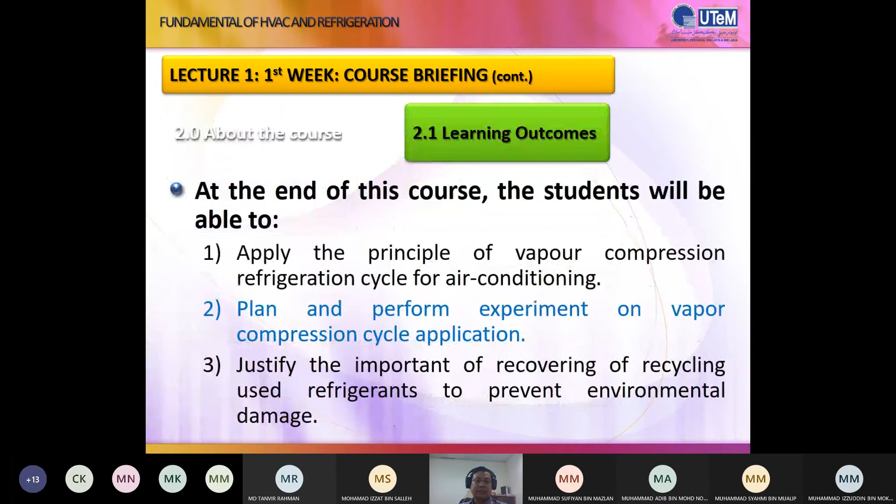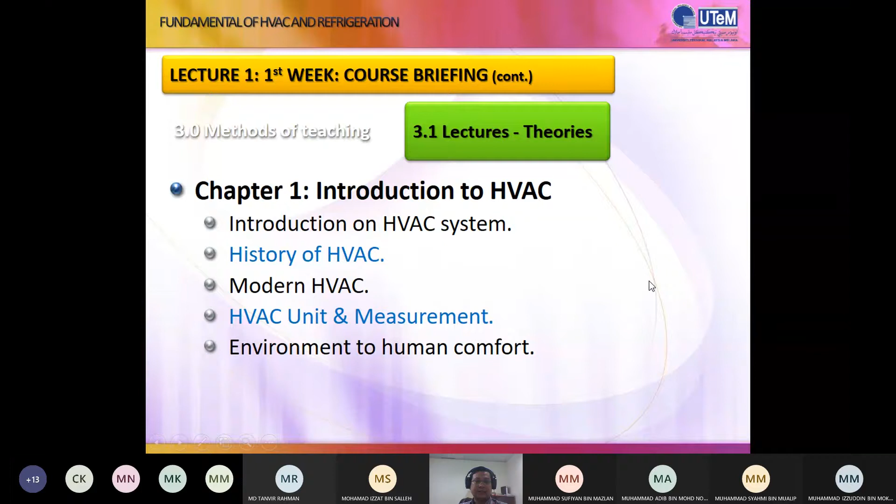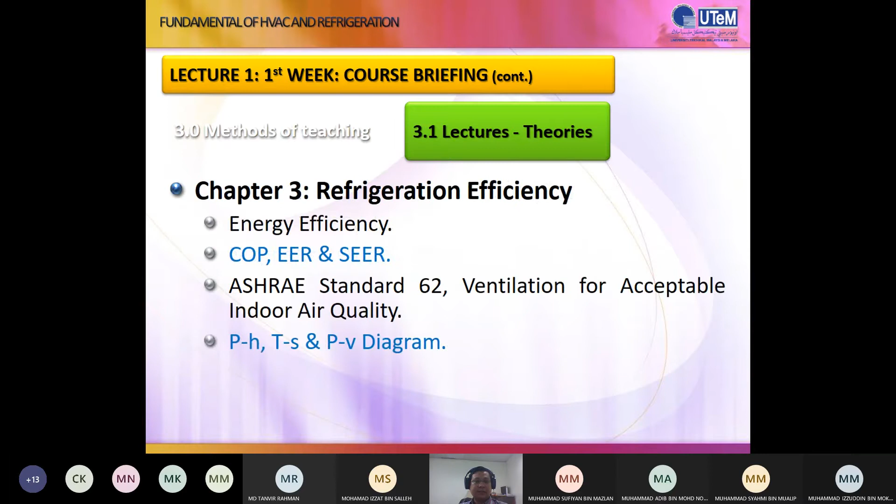So this is what we learned in chapter 1. Actually, you can refer to this in the teaching plan, chapter by chapter, and I will put this based on the week.

And then laboratory, based on this plan, maybe 7 labs, but I'm not sure what Encik Fairuz will plan for this semester, because we can only conduct online.

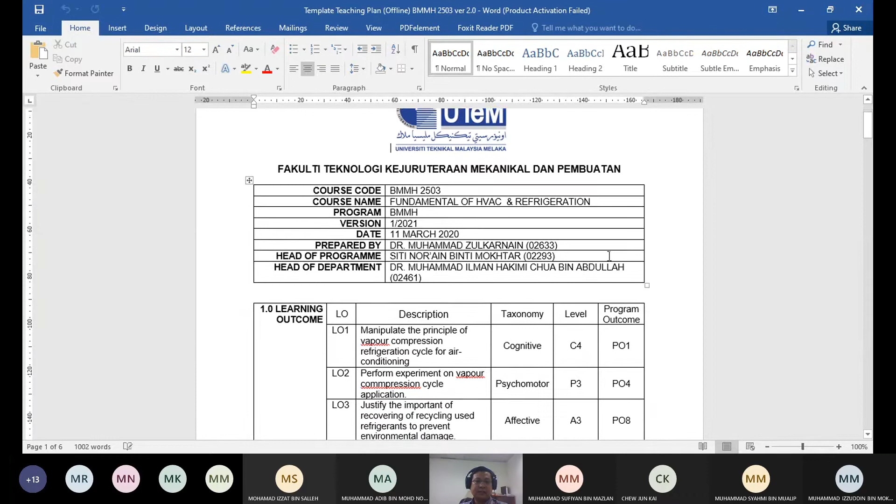So we are under BMMH, with the fundamentals of HVAC and refrigeration. This is LO, meaning learning outcome. We have 3 learning outcomes, and then referring to the skill - what skill we will conduct, like cognitive, psychomotor, affective.

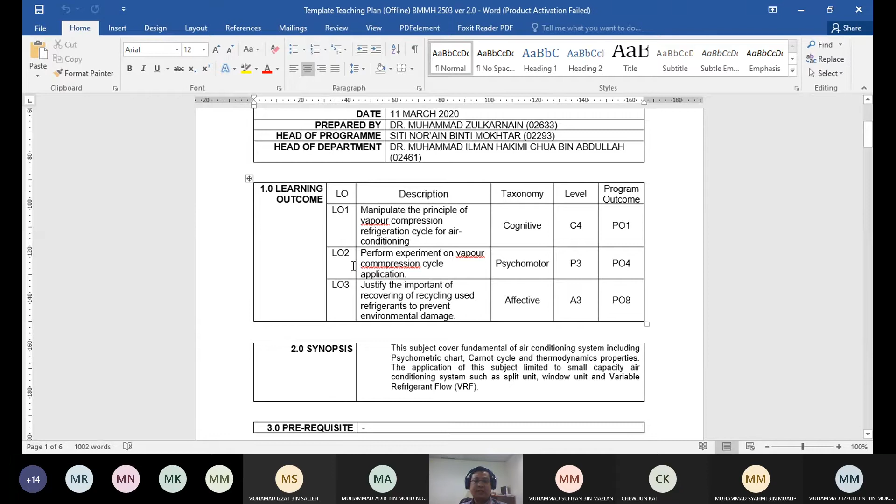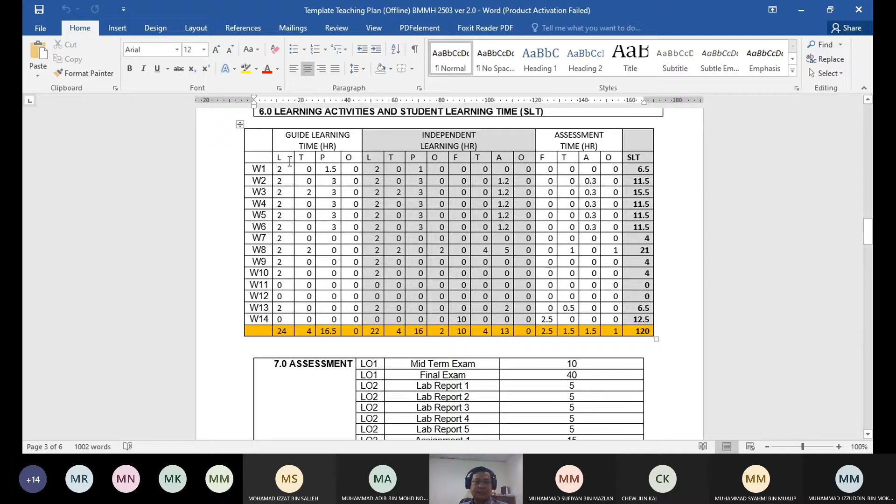Psychomotor means it should be hands-on, meaning it should be conducted in the lab. This is our references, and then our plan - more lecture, tutorial, and practical. This is for assessment.

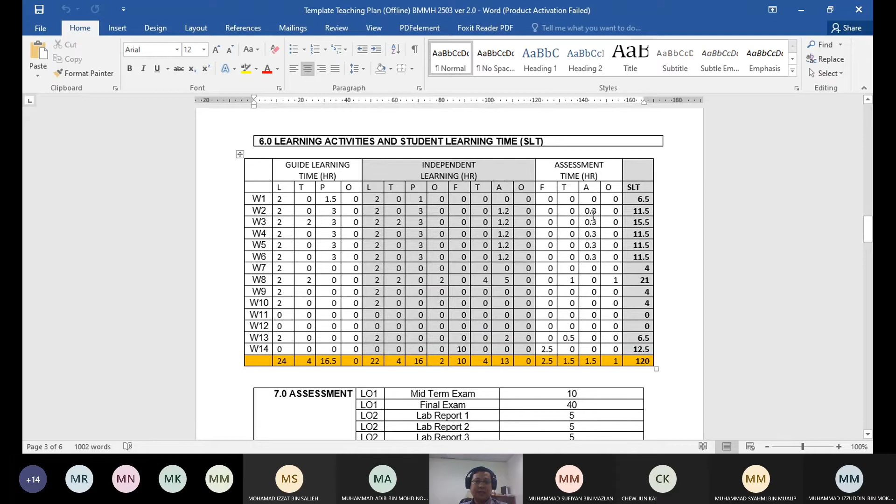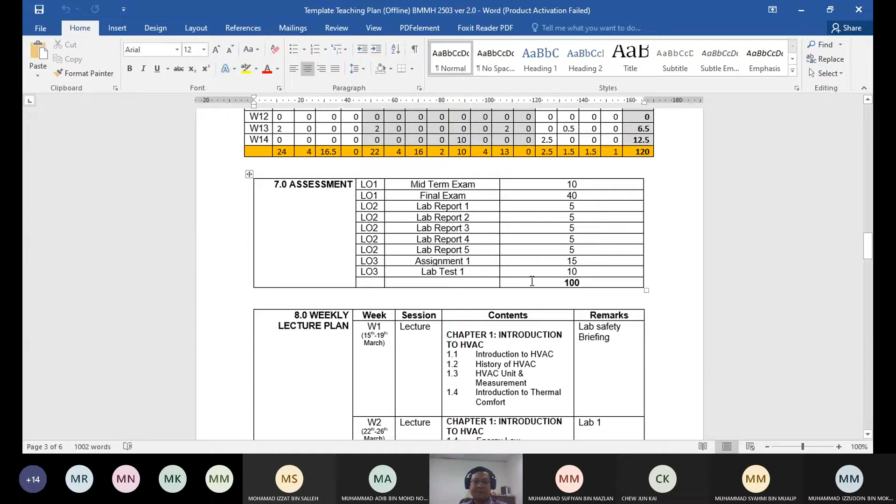And then lab, every lab - we have 5 labs here, so I think only 5 labs will be conducted this semester. So every report, lab report will be assessed by 5%, times 5, meaning we have 25%. Assignment is only 1, so we have 15%. Lab test is only 1 time, once, so 10%.

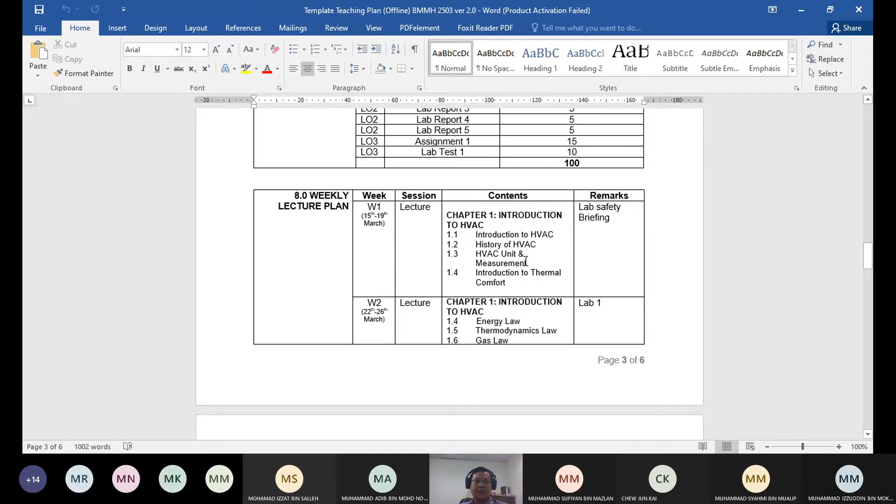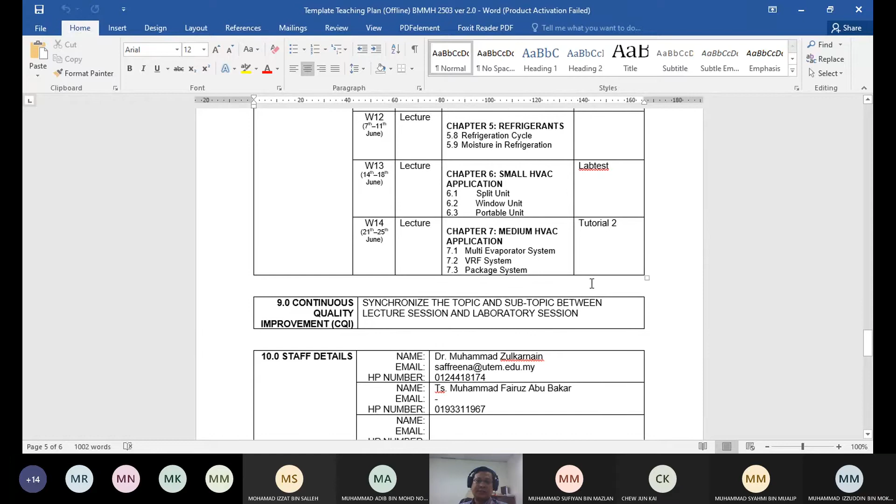So the total is 100%. So the plan, what we will conduct every week, and what topic we will cover every week, we can see in this table. Chapter 1, first week is introduction to HVAC, and continues chapter 1 for next week - energy, thermodynamic law, gas law, until enthalpy. Then week 3 until week 14, you can check by yourself what topics we cover. Okay, that's all I think.

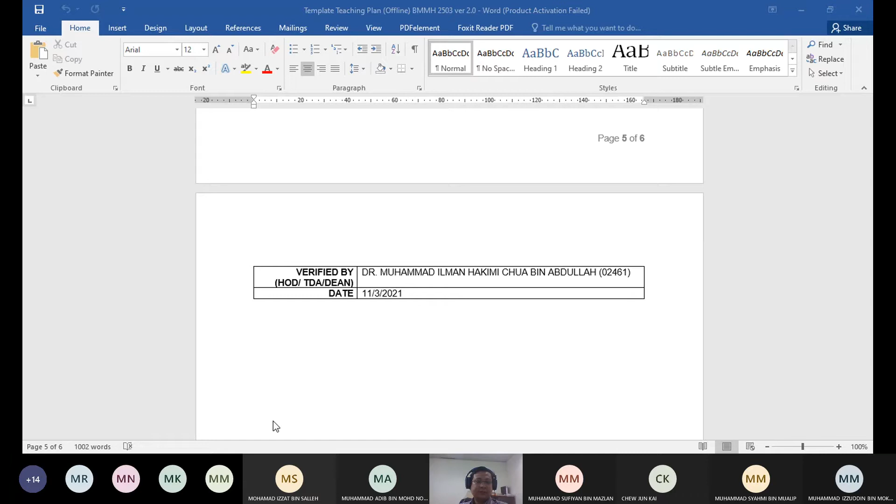No, sir, but the slide - you can see the slide? Just now? Yes, doctor. Yes, yeah, I can see the slide. Yeah, because only me speaking in the camera, so it's just like talking alone.

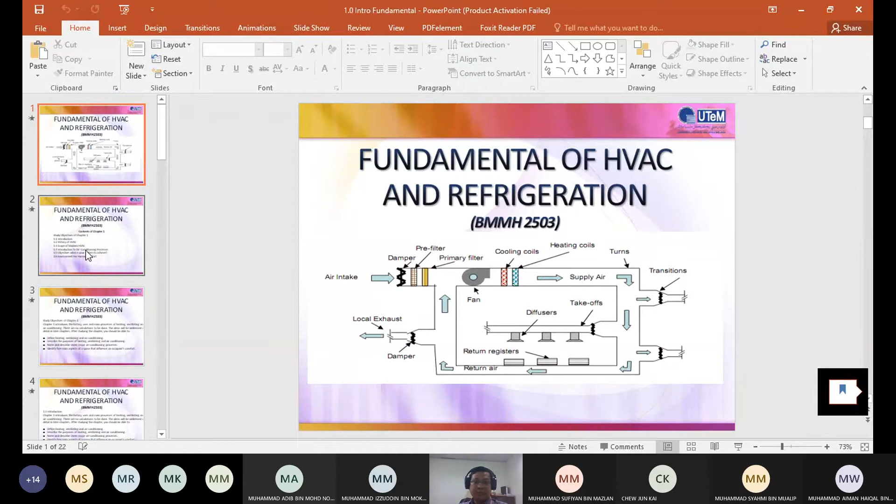So I continue to share the topic we cover this week. First week of topics - okay, we'll cover introduction, history of HVAC, scope of modern HVAC, introduction to air conditioning process, objectives, what the system aims to achieve, environment for human comfort.

The study objective of chapter 1 is to introduce the history, uses and main process of heating, ventilating and air conditioning. There are no calculations to be done - the ideas will be addressed in detail in later chapters. After studying this chapter, you should be able to define heating, ventilation and air conditioning, describe its purpose, name and describe the 7 major air conditioning processes, and identify 5 main aspects of space that influence occupant comfort - to understand what parameters are measured when considering comfort for occupants.

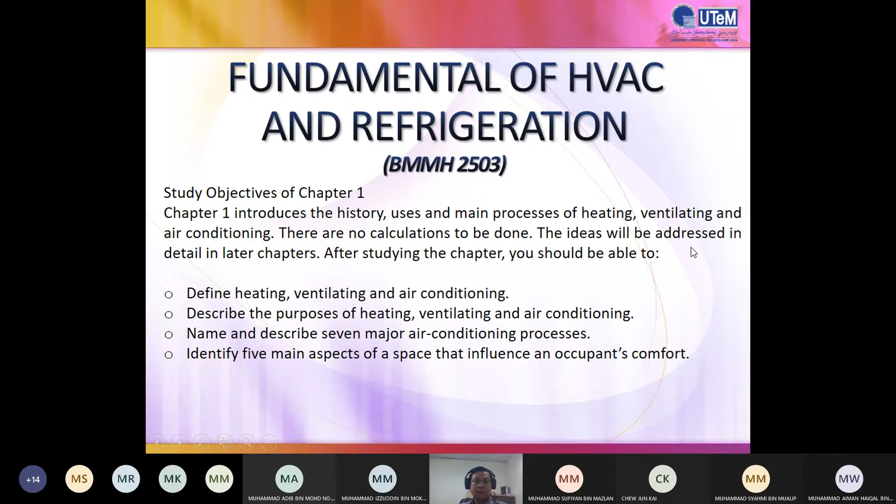Okay, next - heating, ventilating and air conditioning, HVAC, is widely used. HVAC systems include a range from the simple hand-stoked stove used for comfort heating to the extremely reliable total air conditioning systems found in submarines and space shuttles. So actually the application of HVAC is very wide - not only about low temperature, not only about temperature itself, but also about comfort, human comfort.

So we can measure what human comfort parameters we consider when designing HVAC. As it is known, HVAC is not only for low temperature - we can also control high temperature, because sometimes this is implemented in winter. In the winter system, we also use HVAC systems. It's not only designed for summer conditions, but also designed for winter systems.

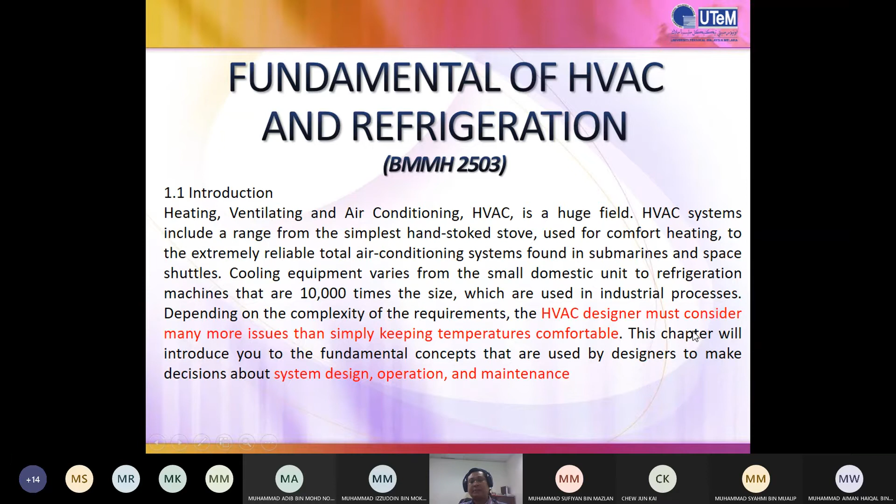This chapter will introduce the fundamental concepts used by designers to make decisions about system design, operation and maintenance. Now, the brief history of HVAC: the system began in the 1800s. The rule of thumb for ventilation design was developed and used in many countries. Then in 1851, Dr. John Gorrie was granted the US patent for the refrigeration machine. By the 1880s, refrigeration became available for industrial purposes.

So the history of HVAC already began maybe 100 years before, so actually a long time, maybe 200 years, of HVAC history.

We should also consider the airflow in buildings, because as buildings developed we need to consider how the airflow can be delivered to the people or residents inside. Throughout human history, technology developed, high buildings already began, and this also developed alongside industry.

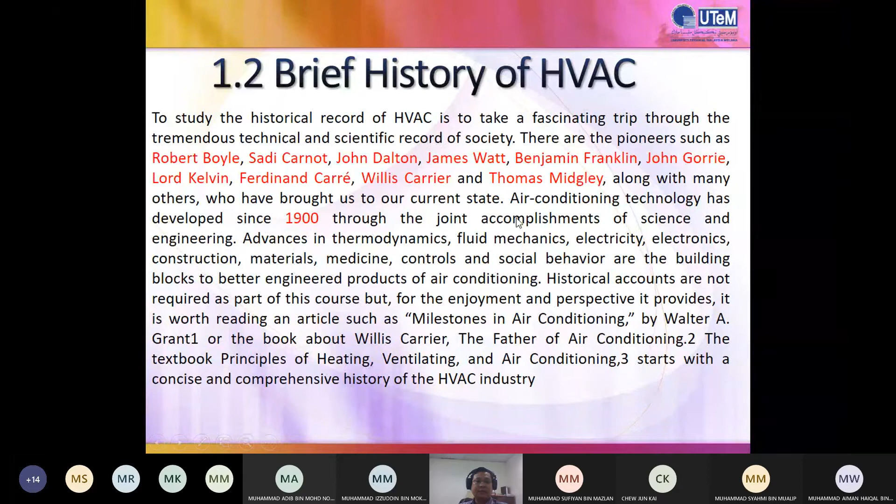Actually, the application of HVAC is not only for human comfort in history. It also came from technology for food storage, how to keep and maintain food, because the waste of food is very high. Also in our condition right now we have a lot of food waste, so we try to maintain food quality and keep it in the refrigerator.

Economic pressures, such as reduction of the ventilation rate during the 70s energy crisis. Ventilation is important in buildings because we create buildings for human residents and for economic purposes like offices and businesses, and we know business tries to develop in high buildings.

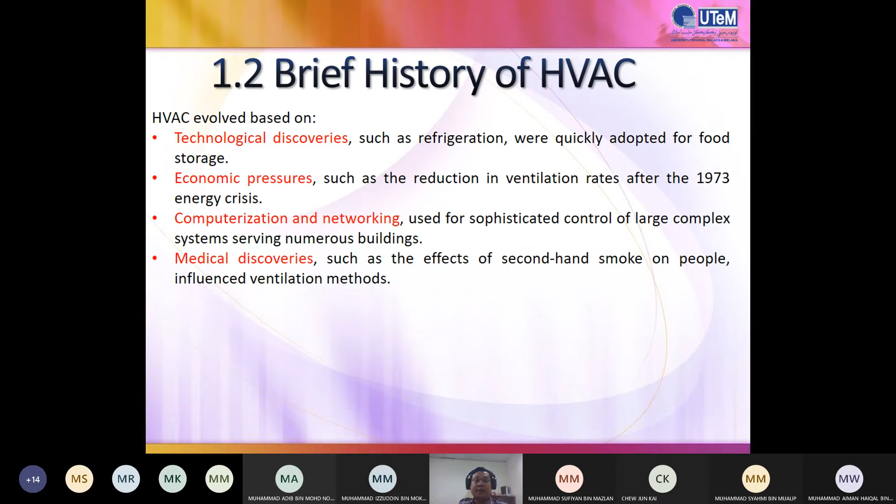Hello there, are you still there? Anybody want to ask something? Yes sir, yes sir, yes sir. Yeah, I hope you can follow my slide.

Now we go to the next subtopic about the scope of modern HVAC design. We'll try to add what parameters to consider to measure in the HVAC design.

The first one is indoor air quality. We can measure whether the air quality inside the building is good, fresh, or not, using the standard of indoor air quality. Naturally, indoor air quality has a law or procedure to measure it, with certain numbers - some numbers indicate good quality, others bad. We call this IAQ, or indoor air quality, for short.

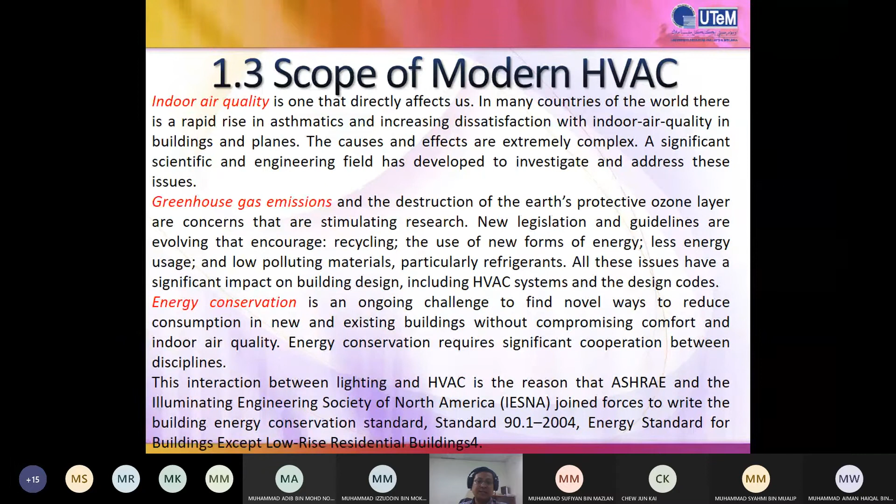So what does the aircon process actually include? I've simplified it into parameters for the processes that occur in one cycle of the aircon process. The first is heating - the process of adding thermal energy to the conditioned space for raising or maintaining the temperature of the space. Sometimes we need heating to maintain temperature, such as in winter conditions, not only for cooling or low temperature conditions.

Sometimes we use high temperature to maintain comfort. Cooling is the opposite of heating - it's the process of removing thermal energy from the conditioned space for the purpose of lowering or maintaining the temperature of the space.

Humidifying is the process of adding water vapor to the air in the conditioned space, for raising or maintaining the moisture content of the air. In the HVAC system, we control humidity by spraying droplets of water inside the system.

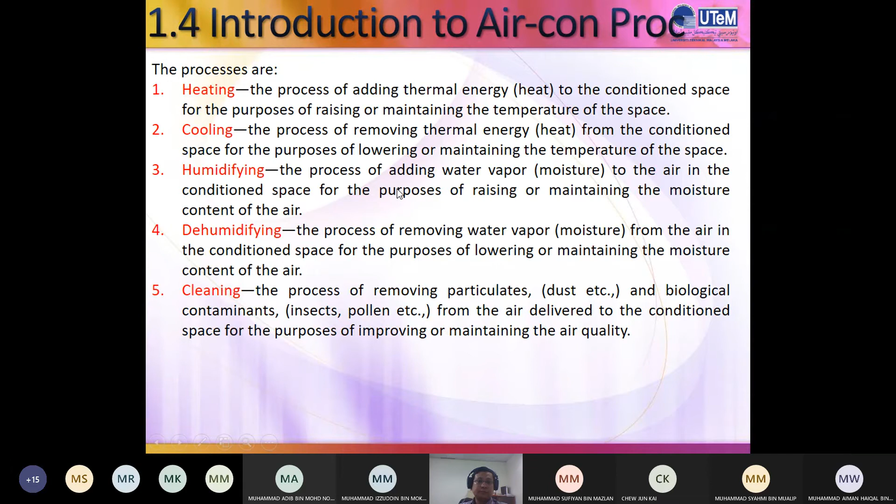And ventilating - the process of exchanging air between the outdoor and the conditioned space, for the purpose of diluting gas contaminants in the air and improving or maintaining air quality, composition, and freshness. In the ventilating process, we change the air from outside to inside the space.

We try to remove air in a certain space. For example, in my room, I have one inlet for airflow and one outlet to replace air to the outside. So we exchange it with new outdoor air, and this condition helps maintain fresh air inside the space.

Air movement is the process of circulating and mixing air through the conditioned space in the building, for achieving proper ventilation and facilitating thermal energy transfer. We should make sure the air still moves at a proper flow rate - not too high, not too low - because air intake should be similar to air outlet. If we don't control the volume balance between the air inlet and air outlet, there will be a problem with air movement.

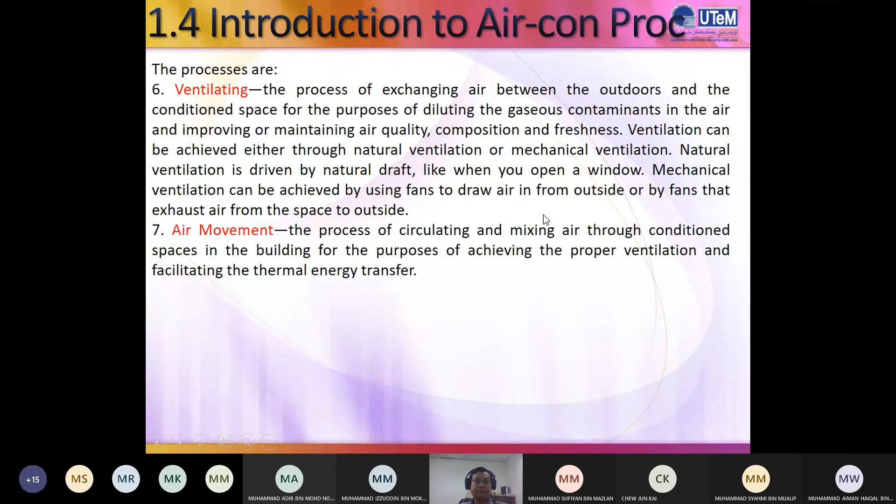And then the objective, what is your system to achieve? So what we need to achieve until we design, we measure certain parameters, and then what we want to achieve is to provide a comfortable environment, to create comfort inside the space.

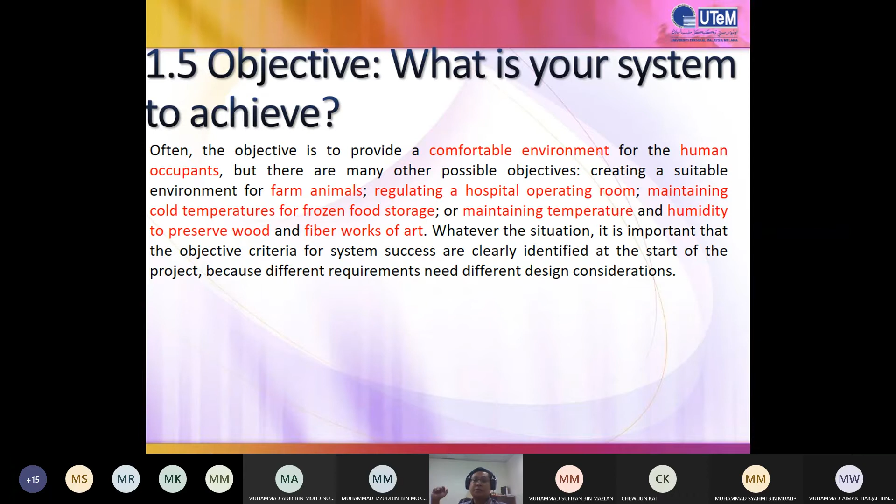It's not only for human, the application is also for farm animals, hospitals, and food storage, and also furniture, devices, and fiber works of art. We have a gallery to keep this art from warming, because high humidity can create damage, so something like that. So it's not only human comfort, but we call it environment comfort. Environment comfort can apply for human, for farm animal, and also for devices.

So now we have our examples. The first example is the farm animal: the design issues are economic, the health and well-being of both animal and worker, plus any regulation. Farm animal spaces are always ventilated, depending on the climate; cooling and or heating may be provided, controlled by a simple thermostat. The ventilation rate may be varied to maintain indoor air quality, maintain inside design temperature, remove moisture, and change air movement over the animal. Cooling is the fourth bullet actually, so we have only four bullets here.

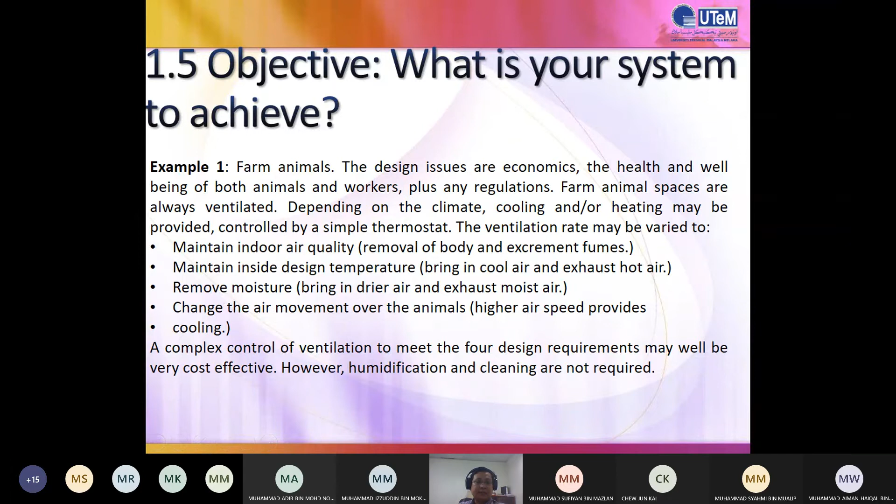So how do we control the farm animal, what should we measure, what should we maintain, what parameters will we use? This example one already gives us parameters to follow to measure. And then example two is for the hospital operating room.

What should we measure, what should we maintain? We should control the parameters, the heating, cooling, what we can control. These are all the parameters controlling for hospital. When designing the HVAC system, you should know what parameters to consider for environment comfort.

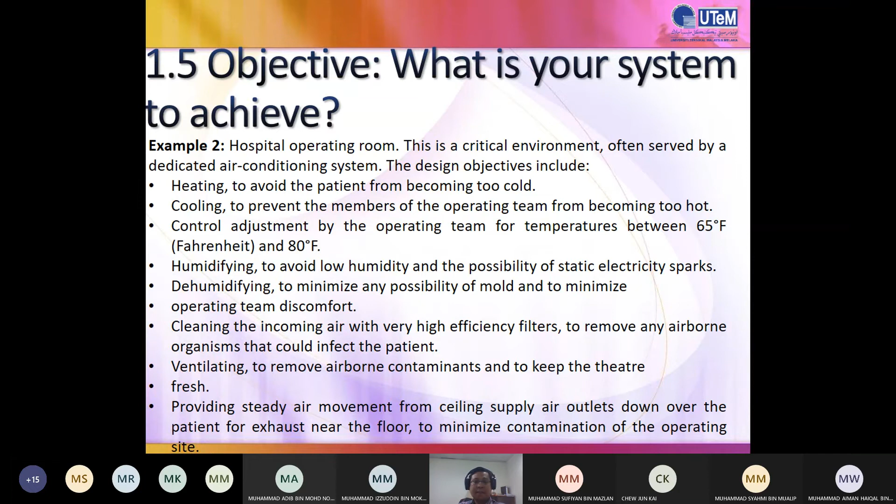Also in example 3, frozen food storage, what do we want to control? Okay, any question from you? Anybody?

No, sir. Okay, actually, sir. I want to hear something from you. You want to share something maybe? What experience do you have with the HVAC system from your observations, maybe in your life, maybe not only work experience.

Maybe you meet something, you buy something. Maybe you go to a cold storage and buy meat from there, frozen meat. So what did you feel? What temperature did you observe? Yeah, maybe different temperature conditions if you want to buy meat, lamb, or fruit and vegetables. So what difference can you feel? Yeah, maybe a difference in temperature. Maybe meat needs a lower temperature compared to vegetables or fruit. Is that right?

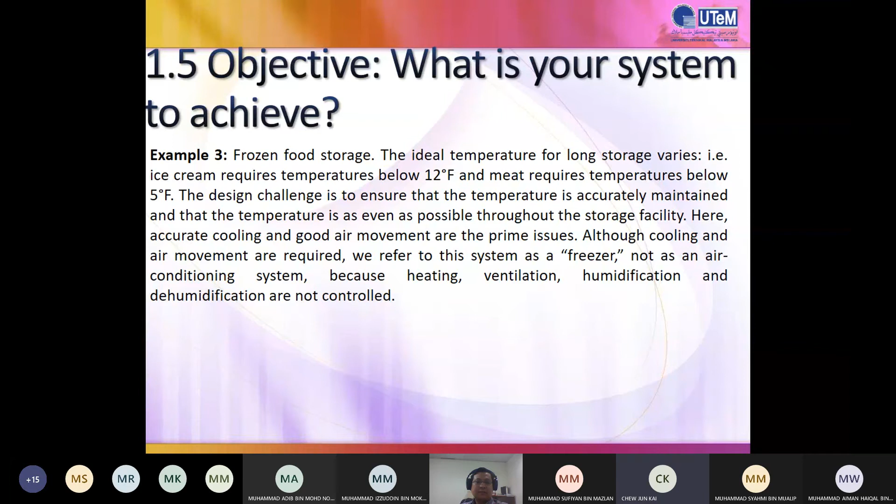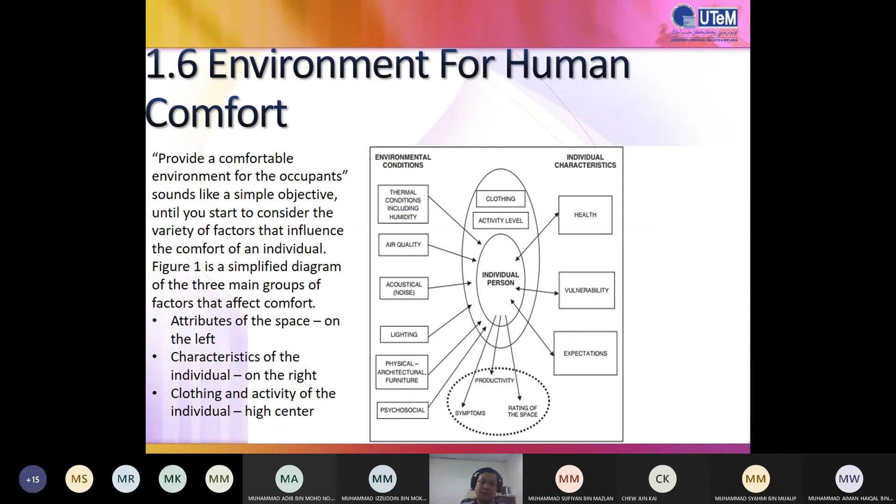So we maybe take one place for human comfort, air quality. Maybe that's only what we can implement in the HVAC system, right? So there are a lot of parameters considered in human comfort. Even in air quality alone, we have certain parameters to measure and maintain that are considered for human comfort.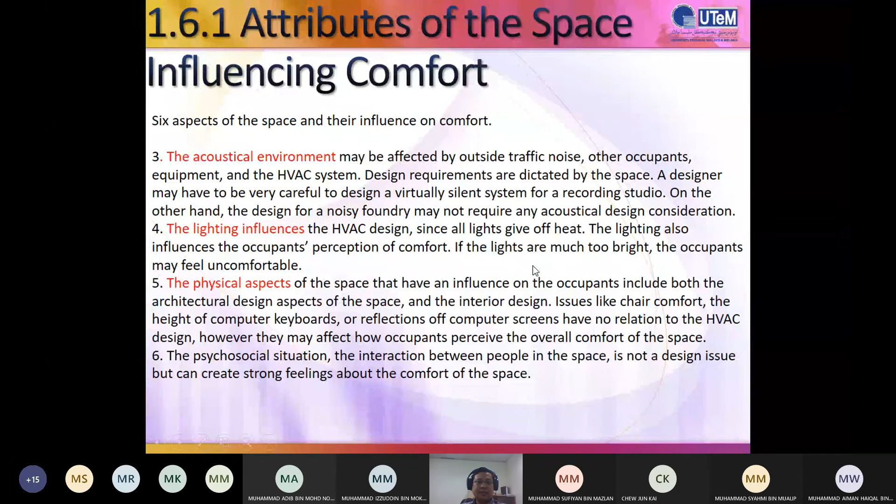Okay, attributes of the space influence thermal and air quality, the acoustical environment, and lighting influences the physical aspect. Then we go to the next characteristic, of the individual that influences comfort, and so on.

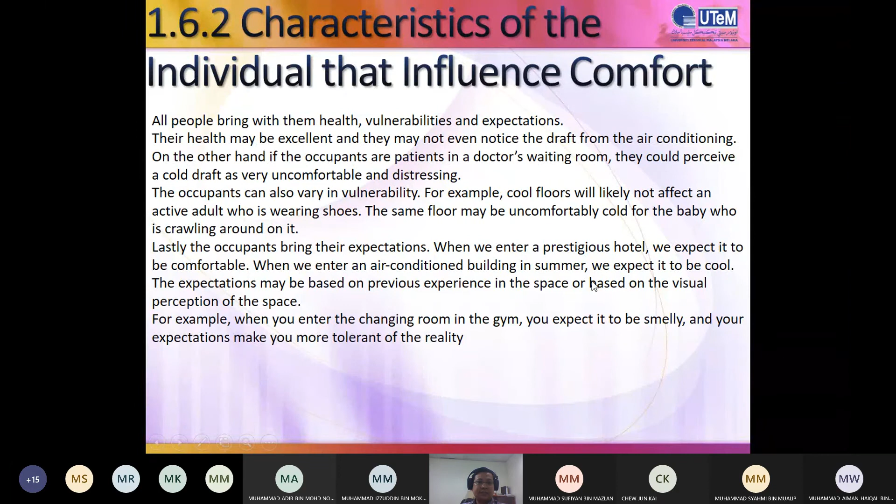Okay, maybe that's all for the first week. I hope we can discuss this if you have confusion or still cannot open your mind to our HVAC subject, because this is the first subject introducing how the HVAC system works.